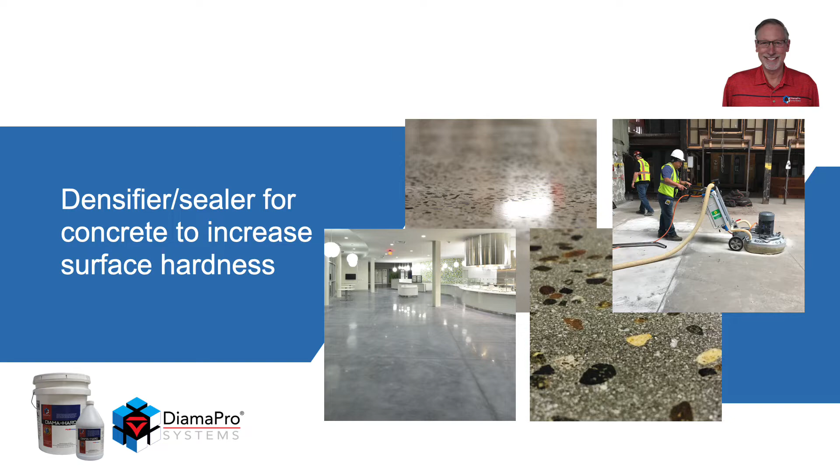DiamaHard Plus is packaged in 1 and also 5-gallon units. It is a densifier sealer to increase the hardness of the concrete surface. It is water-based and also penetrates the surface of the concrete substrate.

Being a silicate, it chemically reacts with the concrete to produce that internal seal. The material has a very low surface tension enabling very deep penetration. It is ideal for polishing and also reducing dusting of the surface of concrete slab, and infused with Microban antimicrobial protection.

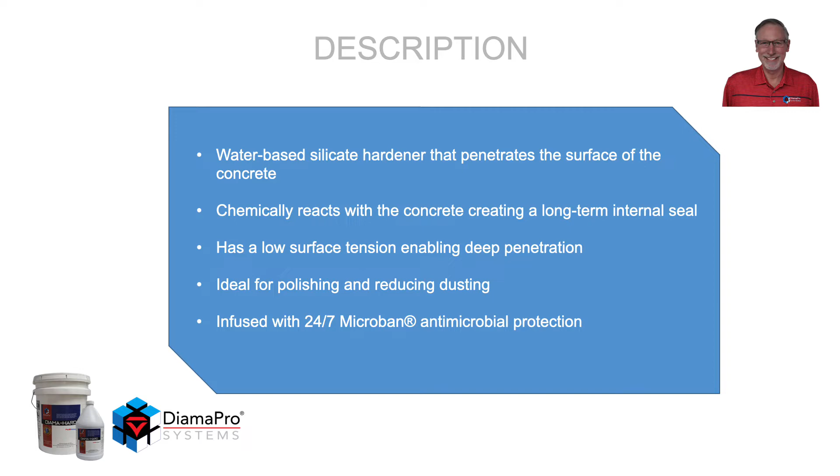What are the recommended uses for the DiamaHard Plus? Well, to increase abrasion resistance. It also reduces dusting. Dusting is a friable surface that, when abraded, will break away and become airborne or just lay on the surface. It also hardens the concrete during the polishing process, which enables you to have a higher gloss level with a better scratch pattern.

It reduces the growth of microbes at the surface to minimize or eliminate odors and staining that could be caused by that microbe. It also can be used as a curing membrane. As soon as you can walk on the slab without marring the slab or putting indentations in it, you can apply the DiamaHard Plus to hold in that extra water so that the concrete can develop its final strength.

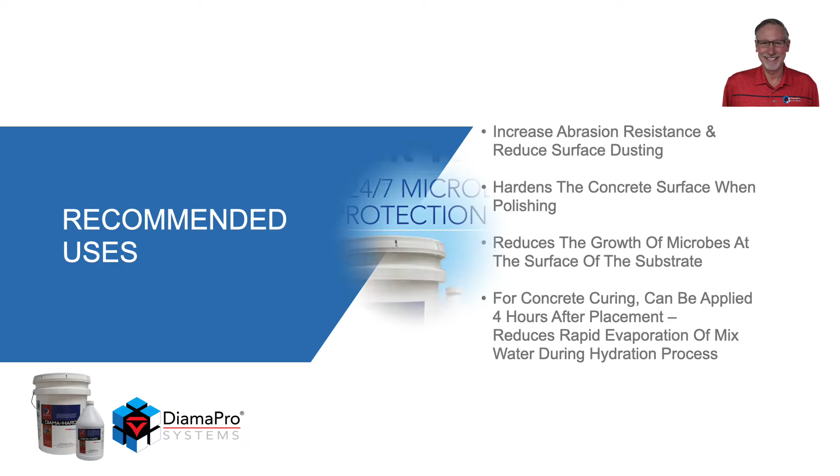The Microban additive is added at the time of manufacturing. It reduces up to 99.9% of the growth of harmful bacteria and fungal microbes. The way it works, it attacks the reproductive system of the microbe so it can no longer reproduce. It also attacks the digestive system of the microbe so it can no longer take on food. So once the digestive system and the reproductive systems are attacked, the microbe will eventually die off.

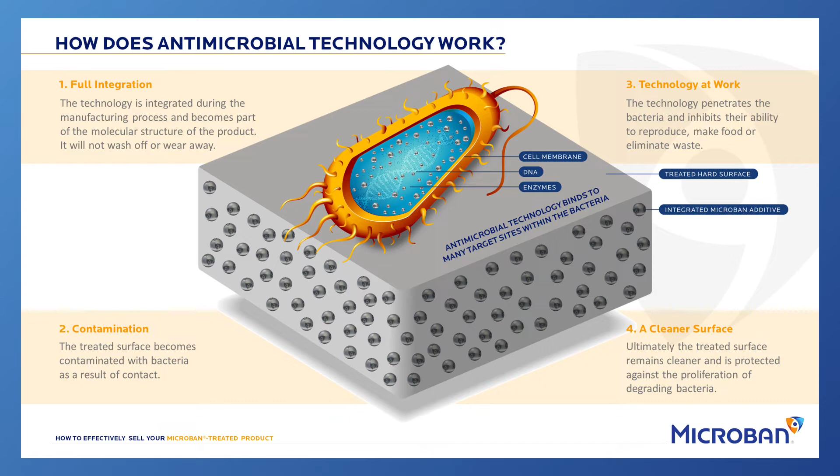Here you have two images. On the left, an unprotected surface, and on the right, a Microban protected surface. When it comes to microbes multiplying, they double in size every 20 minutes. So on the left, over a 24-hour period of time, you can see how many microbes can actually be on the surface. On the right, being that the Microban is attacking the reproductive and digestive system, those are starting to die off.

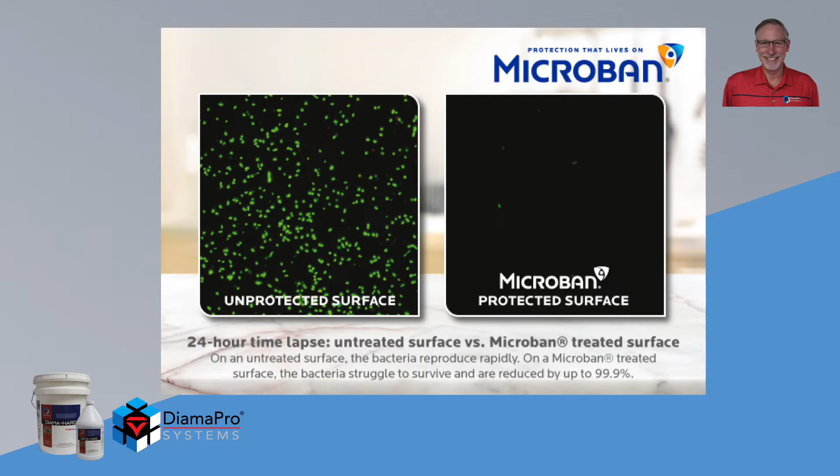Now for the application steps. If you're using the material during the polishing process, the material can be placed anywhere between a 100 and 400 grit tool. Use the pour and spread method or pump sprayer to convey the material to the floor. With a microfiber pad, remove all puddles and create a uniform glistening surface. Within 15 to 20 minutes, the material is fully saturated. If there are areas that need to be reapplied, walk out, reapply in those areas, microfiber, and continue on.

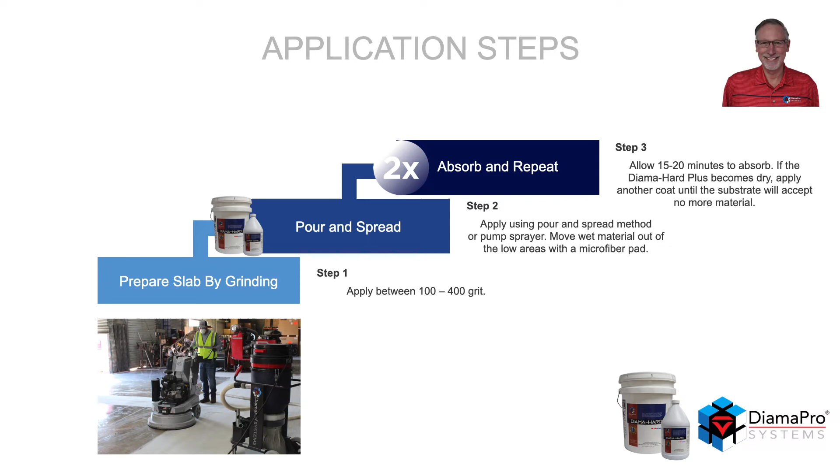Here's the application process. With a pump sprayer, they're applying the material. With a microfiber, they're working the material in and creating a uniform glistening surface. At the top of the video, you can see the material is already absorbed into those areas. At that point, you can walk back out, apply more material. Again, keeping that slab wet for 15 to 20 minutes is the recommended time frame.

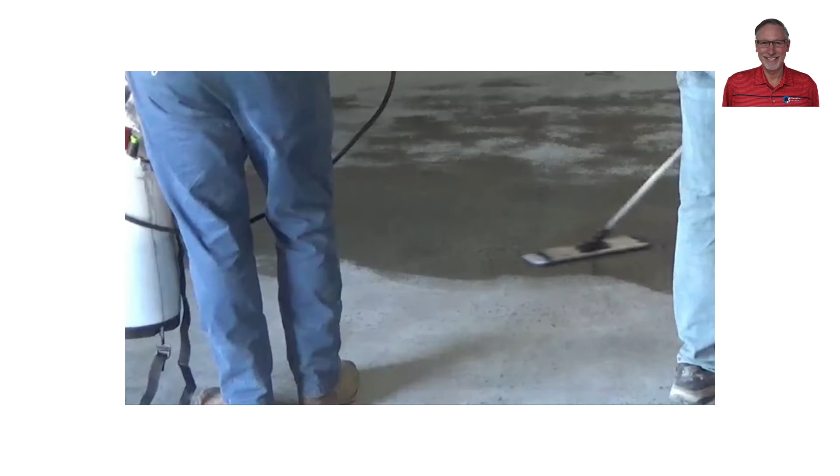The material itself is colorless, has very little to no odor, has no flash point because it does not contain any solvent. The pH is approximately 12.1, which is about the same pH level as the concrete surface, and the coverage rate is anywhere from 400 to 600 square feet per gallon.

Well, the reason why the coverage rate is fairly wide is that the deeper you grind into a concrete slab, the more porous that slab will become. During the production of concrete, air is whipped into the concrete mix itself. Well, that is being trapped within the slab. So when you cut the top off, you uncover those air voids.

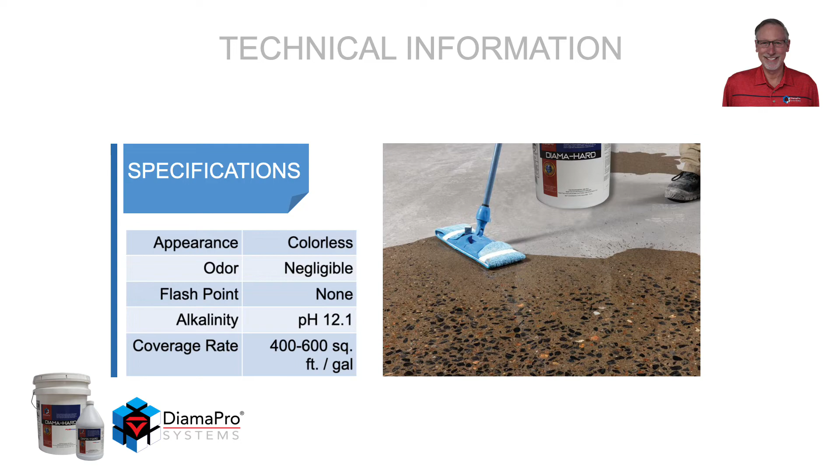With all materials, there are limitations. The substrate itself should be manufactured out of cement. The cement contains lime and calcium, and that is what the DiamaHard Plus reacts with. The wet material should not come in contact with glass or aluminum. These types of substrates should be protected during the application. If it does happen to contact either one, use a wet rag, wipe it off, take a dry rag, remove the rest of the contaminant, and you should be fine.

If you happen to puddle or have excess material laying on the surface after it's dried, it will turn into a white crystal. That white crystal can be removed with your next diamond step. The material is also waterborne, so do not let it freeze during storage or application.

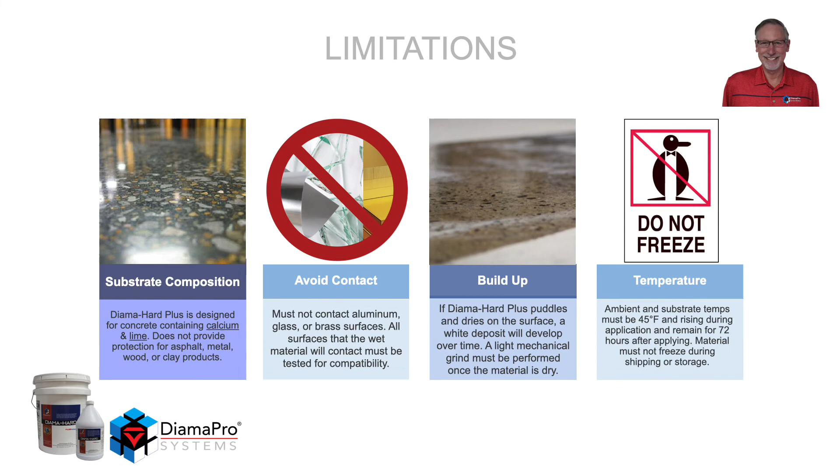The accessories needed to complete the project are microfiber pads, a pump sprayer, 1.5 or 10 liter. The 1.5 is excellent for demos or any type of mock-up, microfiber frames, and also protective gear such as gloves, goggles, things like that should be utilized.

With all DiamaPro equipment and also chemicals, you'll find a QR code on the machine or the packaging. Scanning that will bring you directly to our website for the product that you'll be utilizing. This will contain all the safety data sheets and also technical data sheets. Anytime you're installing a material, make sure everyone has read the technical data sheet in full to obtain all the information required to have a successful project.